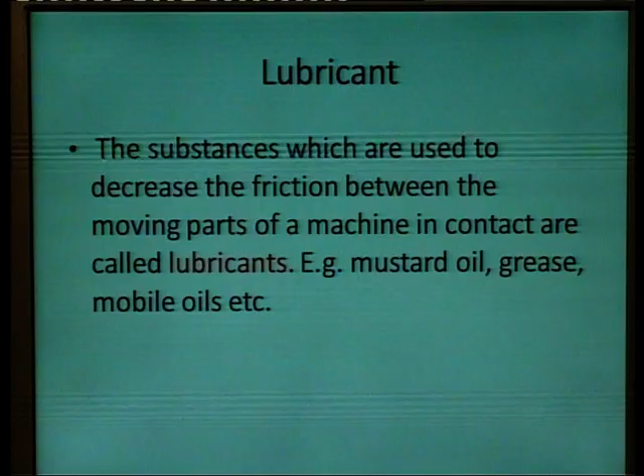Now lubrication, what is lubrication? The process of decreasing the force of friction between moving parts of a machine in contact is called lubrication.

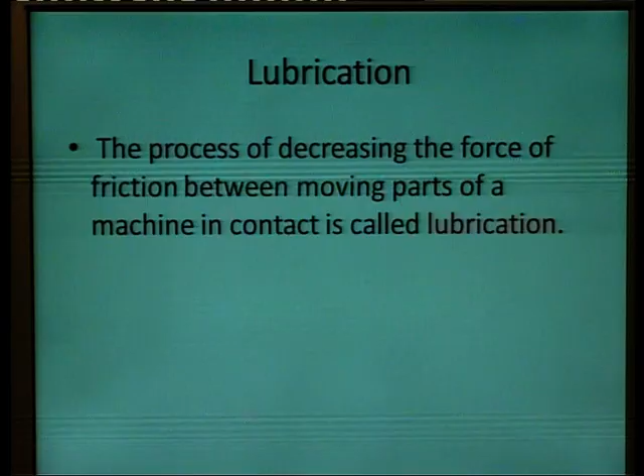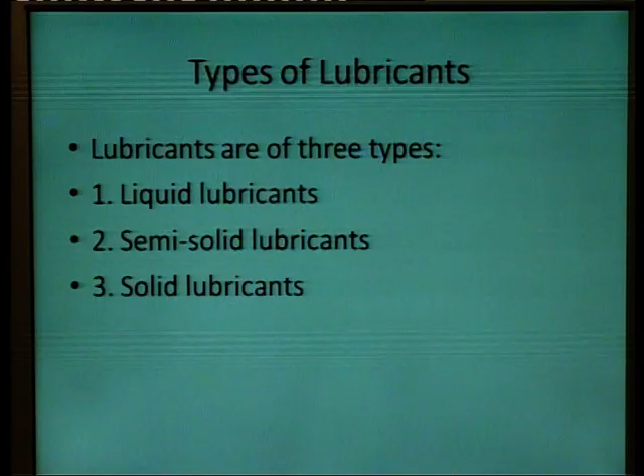Now, applications of the lubricants. Every type of lubricant has its own advantages and disadvantages. Therefore, each and every lubricant is used according to the machine and its use in industry and at home. It means if any lubricant can be used in industry, it does not mean that it can be used at home. This is what we mean by its own advantages and disadvantages.

So when we select a lubricant, we have to keep in mind 3 things. First, whether it is to be used in the industry. Second, whether it is to be used at home. Third, the purpose for which the machine is to be used. Depending on whether it's for industry or home, we will choose which lubricant to use.

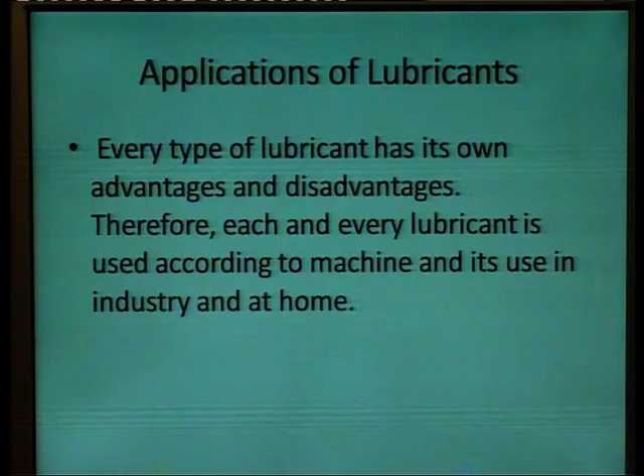Now, applications of the liquid lubricants. The first is as anti-wear, antioxidant and anti-foaming agent. It means we are talking of 3 functions. First is anti-wear, meaning it should be able to stop the damage to the machine.

Second, we are talking of antioxidant. It means the oxidation of the lubricant, that is reaction with the oxygen present in the air, should not take place. Third is anti-foaming, meaning the lubricant should not mix with other dust particles etc. present in the air to form foam. So it should be an anti-foaming agent, because if a lubricant is not able to do these things - stop the damage, stop the oxidation, or stop the formation of foam - then that lubricant is not going to be a good lubricant.

Second is as demulsifying and emulsifying agents. Now these 2 terms are actually opposite. Sometimes we need a lubricant which should emulsify, that is mix with moisture and form an emulsion. Second, it should break that emulsion and de-emulsify itself, going back to the liquid lubricant, that is oil, and the moisture form.

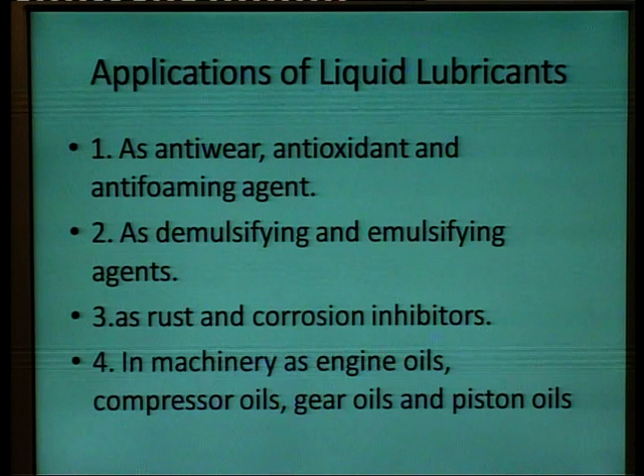Fifth application of the liquid lubricants is as hydraulic, brake and gearbox fluids. Lubricants are also used in the hydraulic brakes for them to function properly and in the gearboxes to change the gears easily. Then sixth, it is used in the soap and paint industry in different machinery parts.

Then seventh, synthetic liquid lubricants are used in turbines, vacuum pumps and semiconductor devices. Synthetic lubricant means lubricants which are prepared from crude petroleum, to which we add some additives to improve their functioning. We use it in turbines which produce electricity, in vacuum pumps which create vacuums, and in semiconductor devices, because all these things need particular applications of particular parts, so they need a particular lubricant.

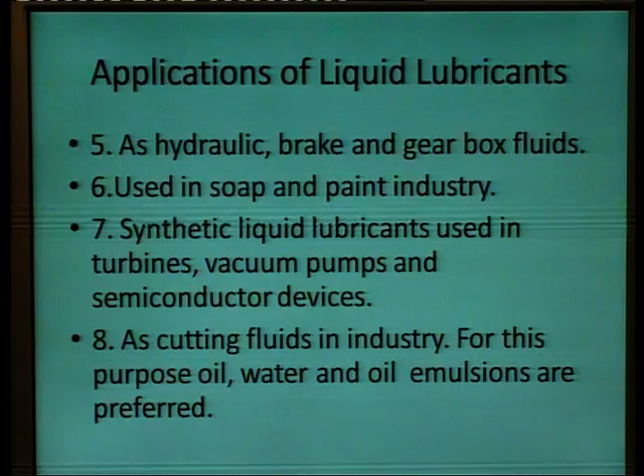Then is application of the greases. Greases are semi-solid lubricants which are formed by mixing together soap, oil waxes, fats and petroleum residue. Greases are obtained from crude petroleum, which has different fractions. One fraction is of waxes, known as oil waxes. So when we mix the soap, oil waxes, fats and the petroleum residue, we get something which is called a grease. This is semi-solid, it is not liquid.

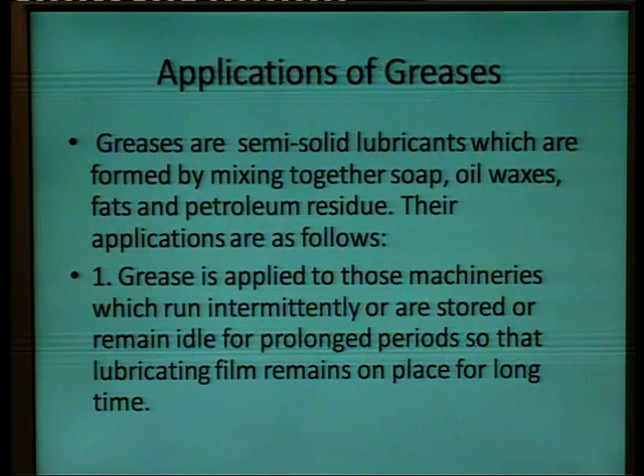Grease is applied to those machineries which run intermittently or are stored or remain idle for prolonged periods, so that the lubricating film remains in place for a long time. It means semi-solid lubricants are used in those machines which are used seldom, sometimes only, and which have to be kept in the store for long periods, so that when we run those machines we do not encounter any friction problems.

Second is when frequent lubrication is not possible in the machines. So greases are also used in those machines where we cannot use lubrication daily or on an hourly basis. So we are using greases there.

High quality greases can lubricate isolated or relatively inaccessible parts for long time periods without frequent replenishing. This means we do not have to apply the greases again and again, say after 2 or 3 days. We can apply the greases after a week, after 15 days, or even after a month, because these are not going to get off the machine parts.

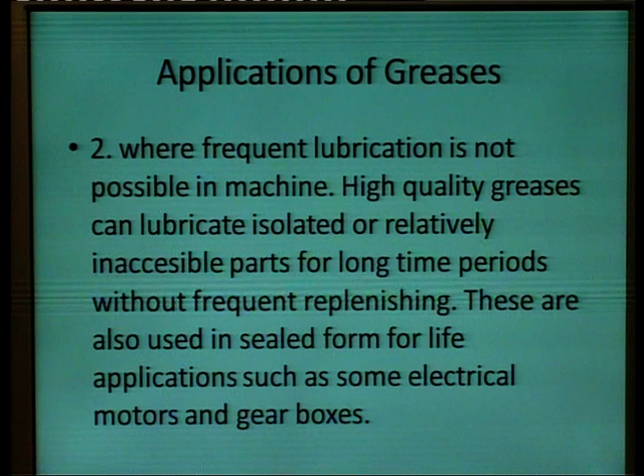These are also used in the sealed form for life applications such as some electrical motors and gearboxes. So greases are also used in some electrical motors or gearboxes in sealed form, which is why we do not have to apply them again and again.

Then in those machines which work under extreme conditions of high temperature and pressure, shock loads, or slow speed under heavy loads. First is high temperature and pressure, where oils decompose. Second is shock loads, meaning the force applied on the machine is in the form of a shock, such as sudden brakes in an automobile. Then is slow speed under heavy loads, such as trucks moving and the axles of the trucks moving at very slow speeds.

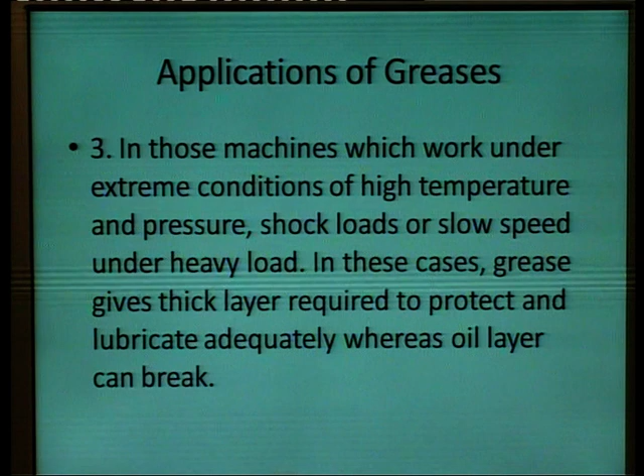In these cases, greases give a thick layer required to protect and lubricate adequately, whereas an oil layer can break. So it means that grease can stay in place for a long time compared to oil, which is going to break after some time.

Then, greases maintain a thicker film in clearances increased by wear and tear, which extends the life of the worn parts. It means that machine parts which get damaged due to non-application of lubricants or due to bad oils being used, sometimes have gaps increased within the moving parts. So we can reduce those gaps by applying the greases, decrease the friction, and increase the life of the machine.

Then, thick grease layers also provide noise insulation, meaning they act as insulators.

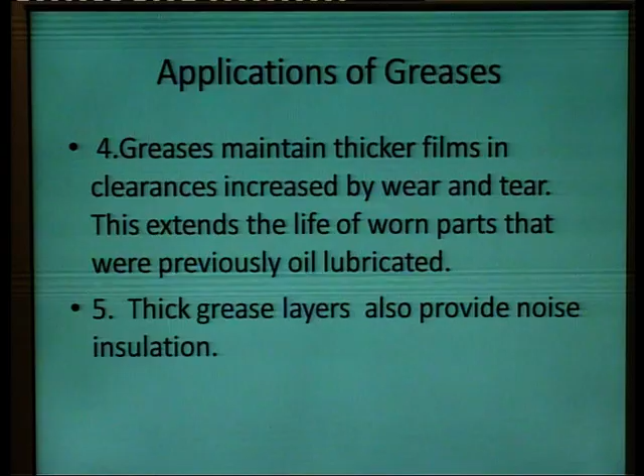Then is application of solid lubricants. Solid lubricants are actually powders which are used as lubricants, such as molybdenum disulfide or graphite. At high temperatures, of the order of 1926 degrees centigrade, other lubricants tend to degrade or decompose. Greases or oils can either degrade or decompose, react chemically, or evaporate. Therefore, in such conditions, solid lubricants can prove an effective measure.

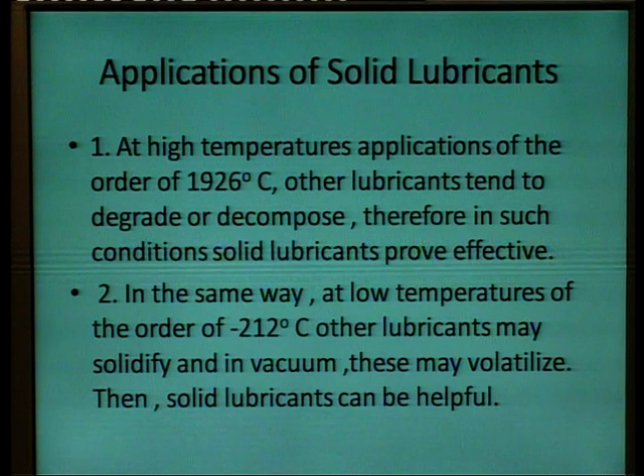In the same way, at low temperatures also, of the order of minus 212 degrees centigrade, liquid or greases can solidify, and in vacuum, such as in space missions, these can volatilize. Therefore, in those cases also we can use solid lubricants.

Then there are equipments which are stored for a very long time and are not in the working period. In those also we use solid lubricants to provide a permanent non-corrosive lubrication. So when we go to use them after a long time, we can use the machine easily without friction.

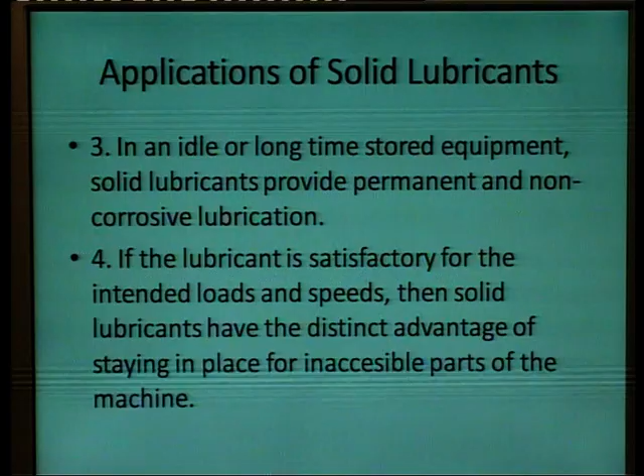If the lubricant is satisfactory for the intended loads and speeds, solid lubricants have the distinct advantage of staying in place for inaccessible parts of the machines. This means solid lubricants are easy to apply in those parts by sprinkling, where oil or grease cannot be applied. So there also solid lubricants are helpful.

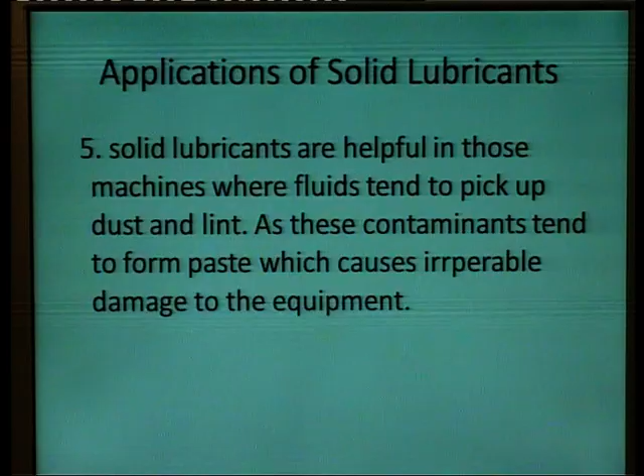Solid lubricants are also helpful in machines where fluids tend to pick up dust and lint, such as in the textile industry. The waste fibers can mix with the oil or grease and increase friction by making a paste. Therefore in those cases solid lubricants are very helpful, because this will stop irreparable damage to the equipment, meaning damage which cannot be reverted.

Solid lubricants are also helpful in machines where migration of liquid lubricants to other parts, equipments and products is not desirable. This means oil can move as a fluid from one part of the machine to another part, but we do not want that to happen. Therefore in those machine parts we prefer to use solid lubricants, because they hold their position and will not spread to other parts of the machine.

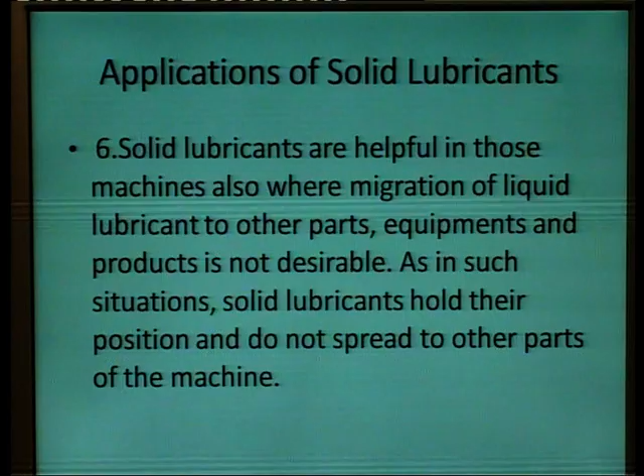Solid lubricants are effective in applications where lubricated equipment is immersed in water, such as in submarines, which are in water most of the time. We need a lubricant for its engines or other equipment which is not going to mix with other things like water, or damage the machine parts. So there we can use solid lubricants.

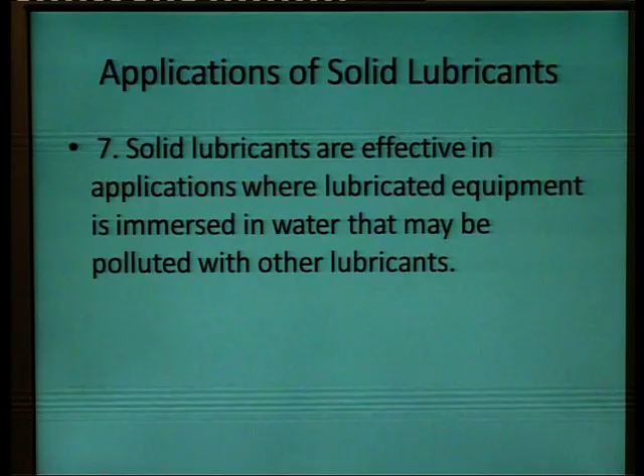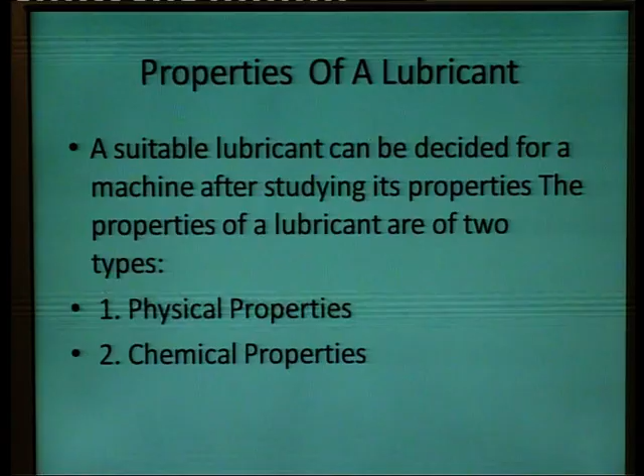Then there are the properties of a lubricant. A suitable lubricant can be decided for a machine after studying its properties. We can select a lubricant depending upon its properties, which are of two types: physical and chemical. Physical properties relate to the physical look or other aspects of the lubricant, while chemical properties are associated with its chemical reactions.

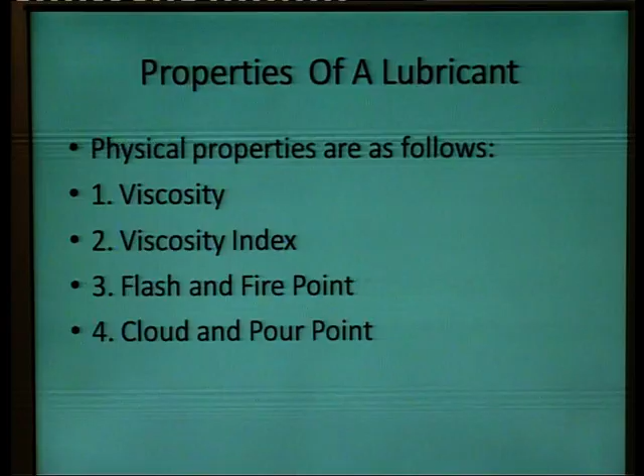The physical properties are viscosity, viscosity index, flash and fire point, cloud and pour point, oiliness, volatility, color and emulsification.

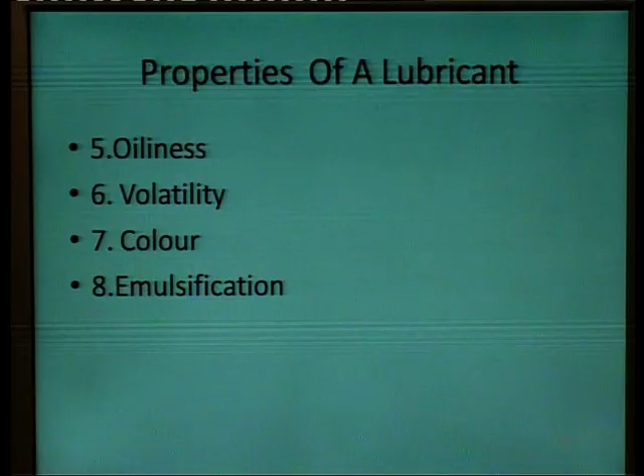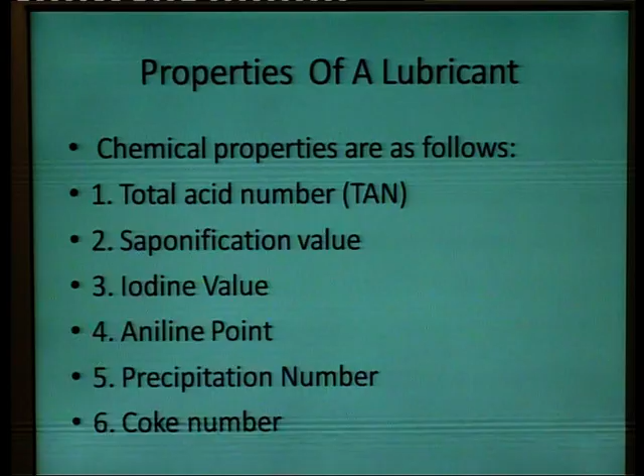Now let us study all these properties one by one, but before that let us see the chemical properties. First is total acid number, also known as TAN. Second is saponification value. Third is iodine value, then aniline point, then precipitation number, then coke number. So these are the chemical properties.

Now let us see what the physical properties are and what they mean. First is viscosity. It is the most important property of a lubricating oil, as it determines the performance of an oil under operating conditions, that is, how the lubricating oil performs under operating conditions, decided by viscosity, and the operating conditions are the temperature and pressure under which the machine is working.

So we can define viscosity as the property of a liquid by virtue of which it offers resistance to its own flow.

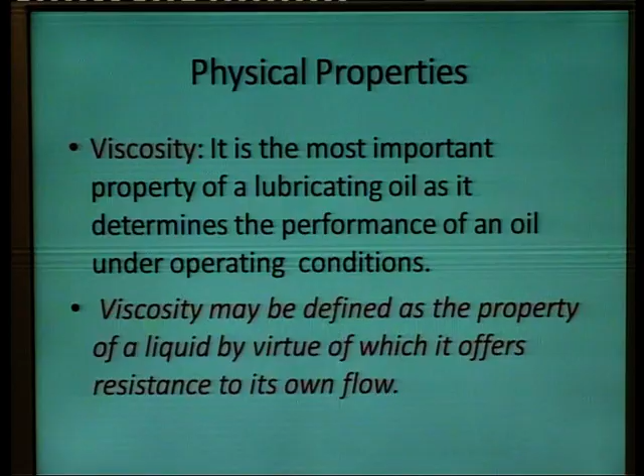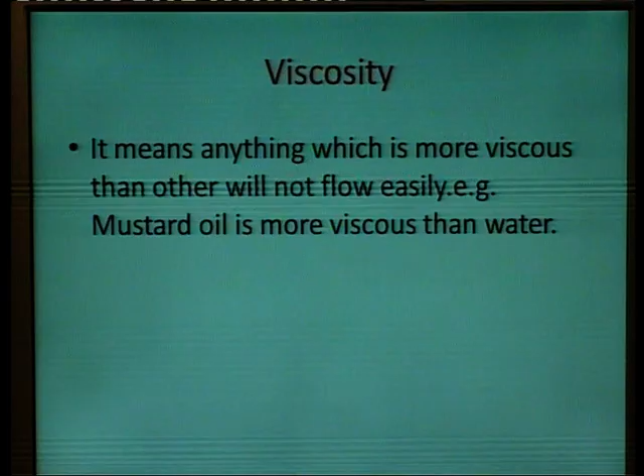So it means anything which is more viscous than another will not flow easily. For example, mustard oil is more viscous than water. We all see that mustard oil does not flow as easily as water does. Therefore we say that mustard oil is more viscous.

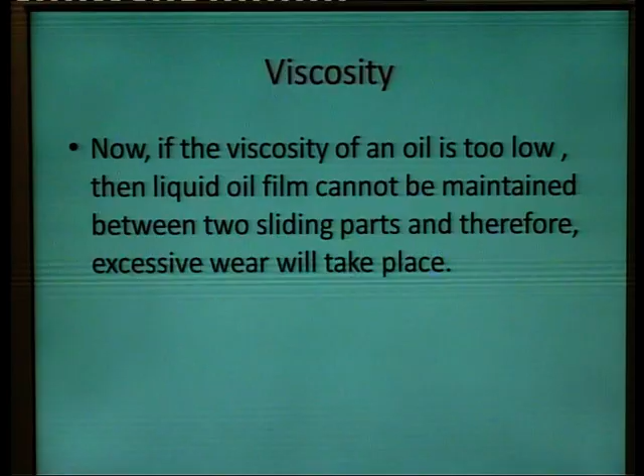Now, if the viscosity of an oil is too low, then the liquid oil film cannot be maintained between two sliding parts, and therefore excessive wear will take place. This means if the oil has viscosity like water or less, it will flow off the machine, so there will be no oil layer on the machine parts. The machine will be without lubricating oil, and wear and tear of the machine will take place, damage of the machine will take place.

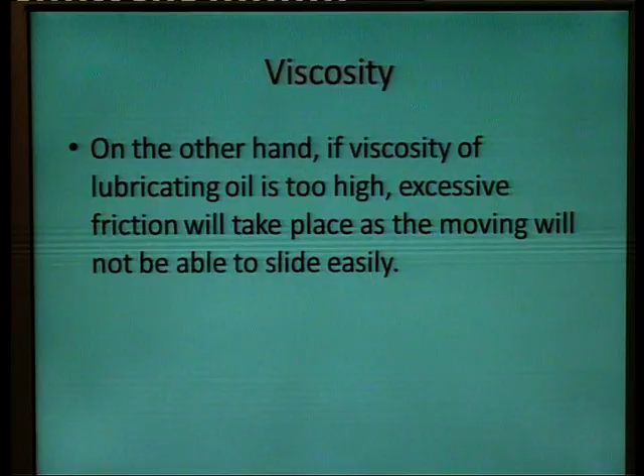On the other hand, if the viscosity of the lubricating oil is too high, that is, it is not moving from one part of the machine to the other side of the same part, then excessive friction will take place, as the moving machine parts will not be able to slide easily. This means if the lubricant is not able to move from one part to the other side of the same part, even then friction will increase. Higher viscosity will also increase friction between moving parts. So low viscosity will increase wear and tear, that is damage, and high viscosity will increase friction.

Now, how do we determine that viscosity is how much? That is determined by the coefficient of viscosity.

Let us consider the equation F is equal to eta V over D, where F is the force, eta is the coefficient of viscosity, V is the velocity by which the fluid or layer is moving, and D is the distance between the two layers of the same fluid.

Now, if V is 1 centimeter per second, that is velocity is 1 centimeter per second, and distance between the two layers is 1 centimeter, then the force is going to be equal to eta, the coefficient of viscosity. So, we can define the coefficient of viscosity as the force per unit area required to maintain a unit velocity gradient.

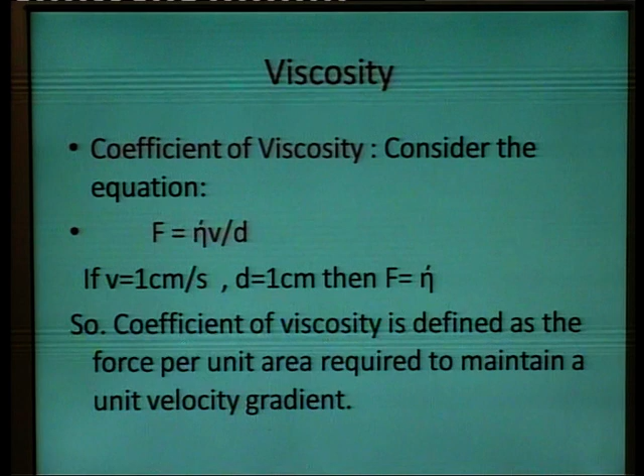Now, units of viscosity. In the CGS system, the units of viscosity are poise, but we generally express it in centipoise, and 1 poise is equal to 100 centipoise, whereas in SI systems the units are 1 Newton second per meter square, and 1 Newton second per meter square is equal to 10 poise, which means 1 Newton second per meter square is going to be 1000 centipoise.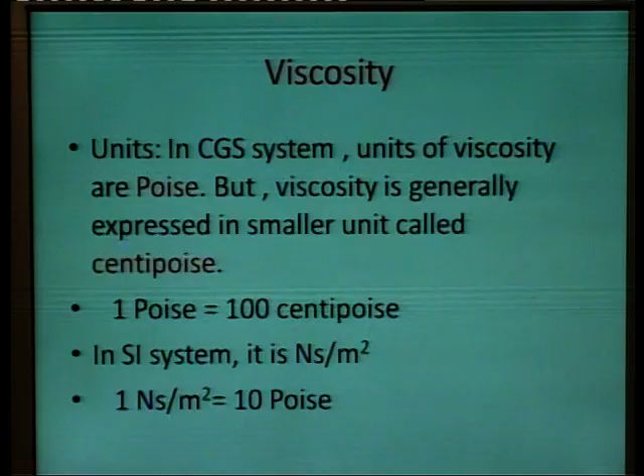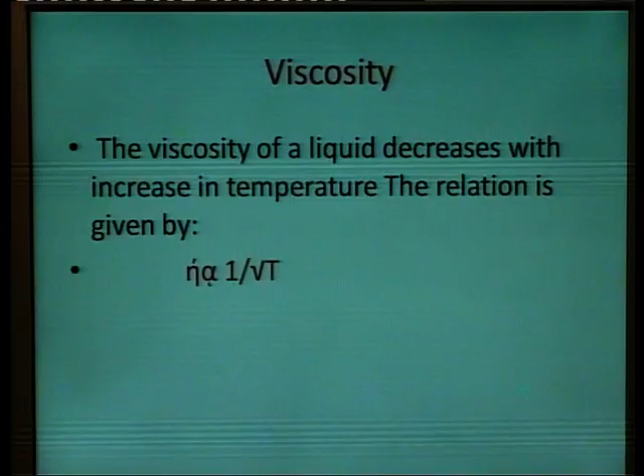Now, the viscosity of the liquid decreases with the increase in temperature. In general, viscosity of any liquid decreases when we raise the temperature of the liquid, that is the force of friction between the moving layers of the liquid decreases. The relation is given by eta is directly proportional to 1 divided by the under root of absolute temperature T. So this relation shows that as the temperature increases, the viscosity is going to decrease.

Next is the viscosity index. The rate of change of viscosity of a liquid with temperature is known as viscosity index. So, as we have seen, viscosity is going to decrease as the temperature increases. Now this is actually measured by the rate by which viscosity increases or decreases as the temperature falls or increases.

Now, if the viscosity of the lubricating oil decreases rapidly, then we have low viscosity index. So it means if the viscosity is increasing or decreasing easily with the increase in temperature, then we have low viscosity index, which is not necessary, which we do not need actually.

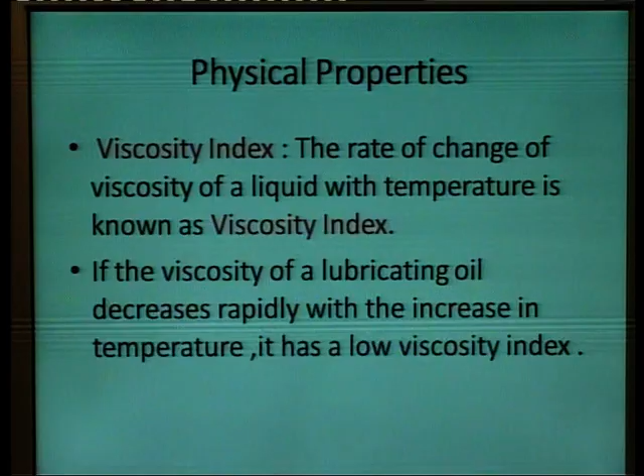On the other hand, if the viscosity of an oil decreases only slightly with the increase in temperature, then it has a high viscosity index. So high viscosity index means the rate of change of viscosity is going to be very low if the viscosity of the oil decreases slightly with the increase in temperature.

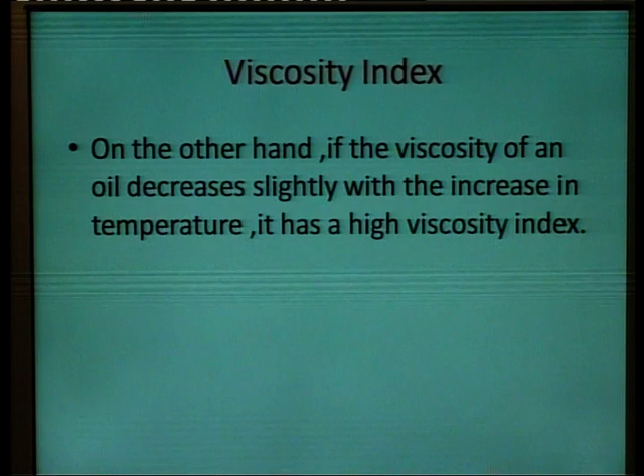Then is the flash point. It is the lowest temperature at which the oil gives off enough vapors that ignite for a moment when a small flame is brought near it.

Now, we have seen it generally, when we take a burning stick to some oil wick, it does not burn at the same moment, because the oil first changes into vapors and then those vapors catch fire. Now, flash point is that temperature at which there are enough vapors so that the flame brought near the oil wick ignites only for a second,

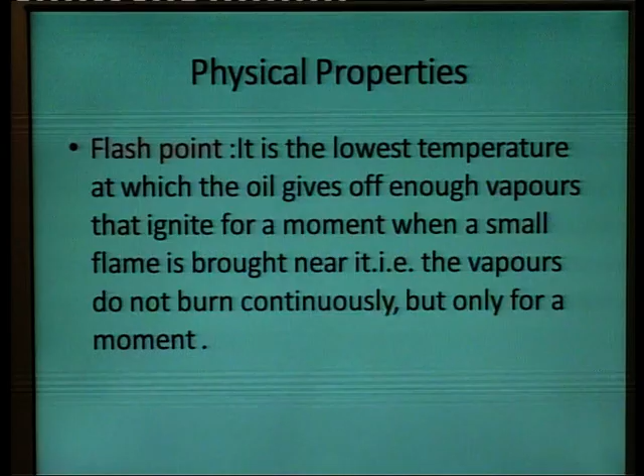but does not burn continuously. But if it burns continuously, then it is called the fire point.

Now, a good lubricant should have high flash and fire points, at least above the temperature at which it is to be used. So what does it mean? It means that the flash and fire point should be higher than the temperature at which the lubricant is going to be used. So if we are going to work at say 45 degrees centigrade, then the flash and fire point should be above 45 degrees centigrade.

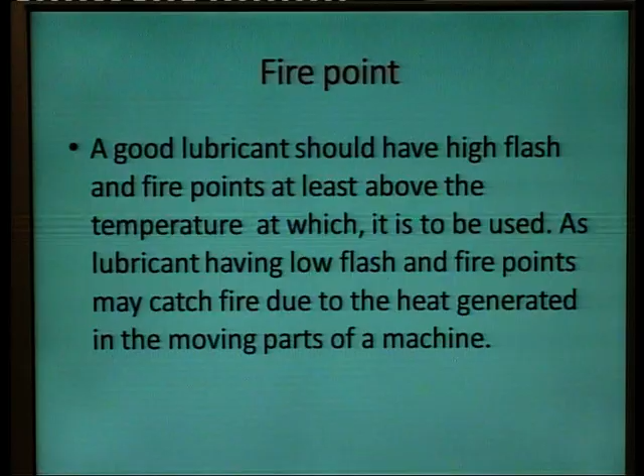Now, a lubricant having low flash and fire points may catch fire due to the heat generated in the moving parts of a machine. Now, if the temperature is low, that is flash and fire points are lower than 45 degrees centigrade,